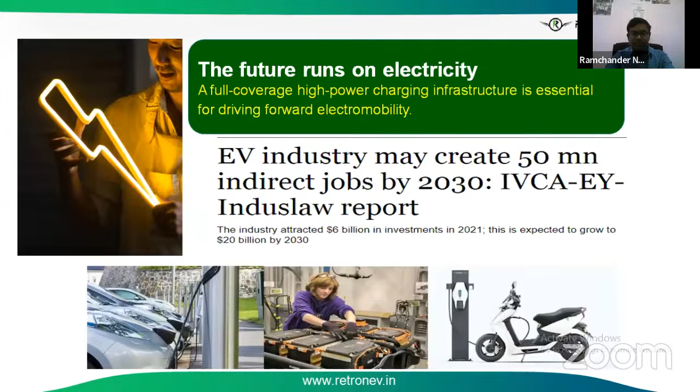That is the reason we have interacted with many professors and industries like HIW training centers. In this EV sector, many job opportunities are coming up, but students are lacking the skills. So for better understanding of the EV segment and EV components like battery, motor, controller - what are the characteristics, how to understand the basic things.

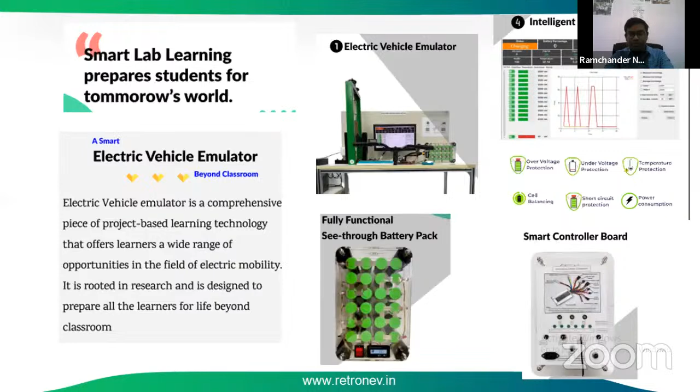This is a battery pack, developed as a fully functional see-through battery pack so every student can easily understand how it is connected - the series parallel combination, and the different components in the battery pack. This is a smart controller board, also developed in-house to understand in a better way - what different ports are there and how they should be connected. And this is the dashboard, where you can get every parameter of the battery pack as well as motor data like current, voltage, DOD, SOC, etc. If somebody is doing research on battery management systems, you can also develop algorithms.

This is our brief journey. At present, our trusted partners are Sri Vishnu Educational Society, BVRIT, and we are also tied up with SRM University, Presidency University, Arbutus Consultants, Agni Solar, and HIW.

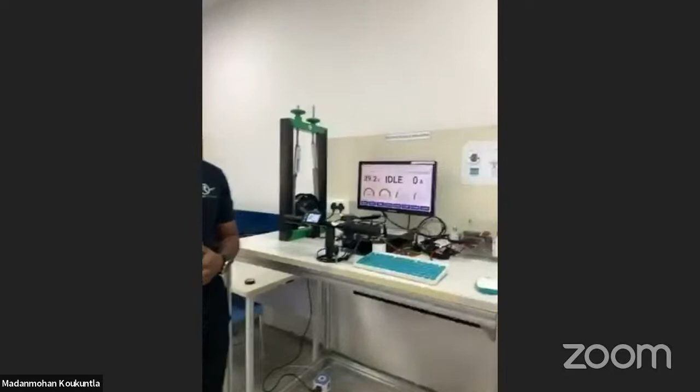I'm a startup co-founder into battery technology, and we've been doing a lot of work in the EV domain. Today we'd like to introduce our EV emulator, an electric vehicle emulator device purposely built for testing EV battery packs and BMS systems.

We have been learning a lot about EV technology, and we have already trained more than 6,000 students, faculties, and industrialists in EV technology. We have that kind of expertise in both solar and EV.

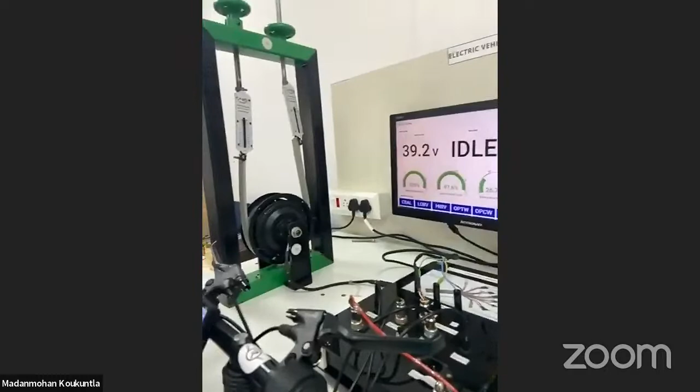So why this device? Whenever we were trying to move towards institutions, people were asking us for practical oriented training. We did not know what practical oriented training was, so we developed some testing machines in-house to test our BMS, our battery pack, and our whole system. This is how the invention was born.

We then developed a machine which is very easy to learn for students. The EV emulator is a project-based learning technology where people can do experiments and learn. So what is it now? It's a project-based learning technology.

I'll go through some components. This is everything that is there in the test rig. You can see there is a transparent, visible battery pack here, which is an industry grade battery pack. You can switch it on and off, and you can see there are so many cells connected in series and parallel.

This gives you a wide understanding about how batteries are made and what technology we have been using in putting the cells together, where the wires are coming from, how we thermally improve it, and what thermal constraints are involved. Now let's go to the battery pack again, and let's also go through the BMS.

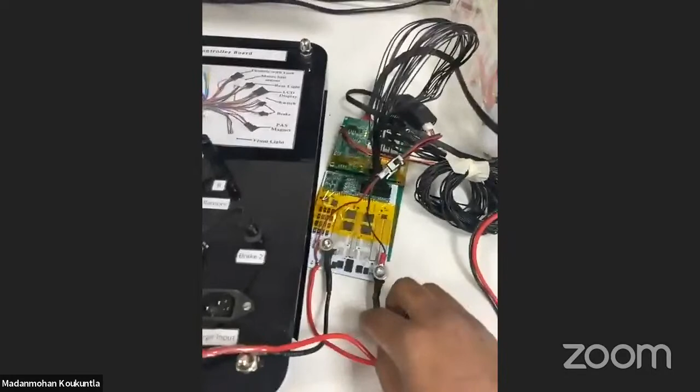If you can see the chip over here, this is the battery management system, and also the IoT system with the master and slave configuration. If you're unaware of battery technology, batteries do need a management system.

There are so many cells here, like 24 cells right now, and there can be more than 200 to 300 cells in a two-wheeler and more than 3,000 cells in a four-wheeler. So how are we going to manage all the cells here? The battery management system does the work.

You can see the switching circuit, the power distribution unit, and also the IoT board here. There are also multiple sensors connected, which will be placed inside the battery pack, giving you the values over here.

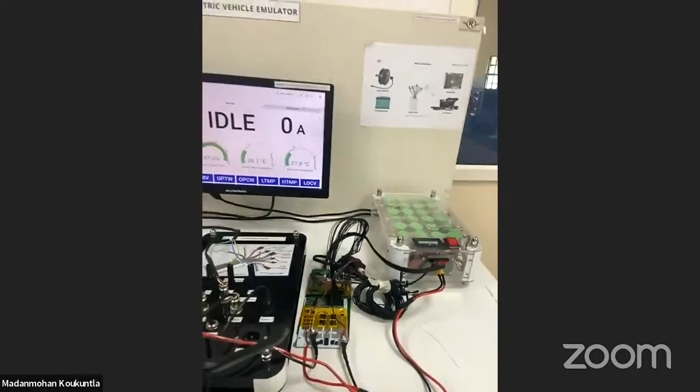We also have developed an interactive dashboard. On the screen here, we can see the voltage and the state of the BMS, and also the current right now. There are so many other faults that you can see here.

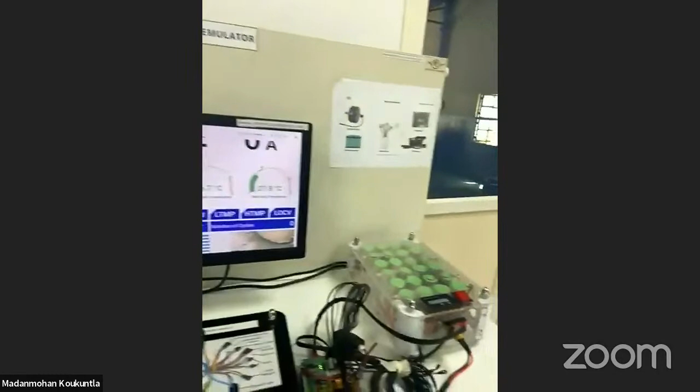If there is any fault in the system - basically we have many types of battery packs and BMSs. This is a smart BMS system developed by us in collaboration with another company, where we are able to figure out everything in the system. There are multiple various faults here, and we can also look at the state of charge, state of health, maximum temperatures, and more.

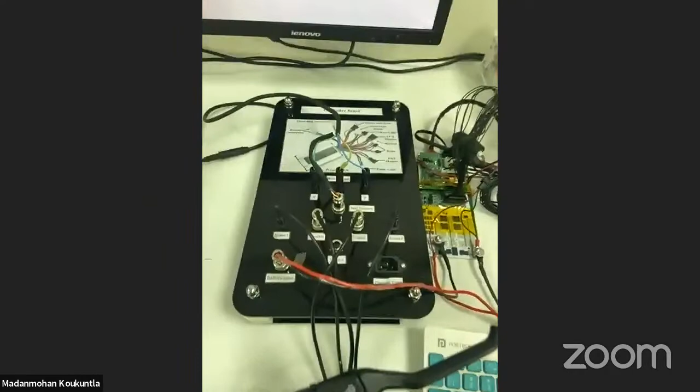I'll come back to the screen. Now let's see a different setup here - a smart controller board, where everything is integrated. The battery, the BMS, and also the motor, everything is integrated here.

This is much like the brain of the system, while the heart of the system is the battery pack, and the brain of the system is the controller. We have developed the controller in such a way that it is easier for us to assemble.

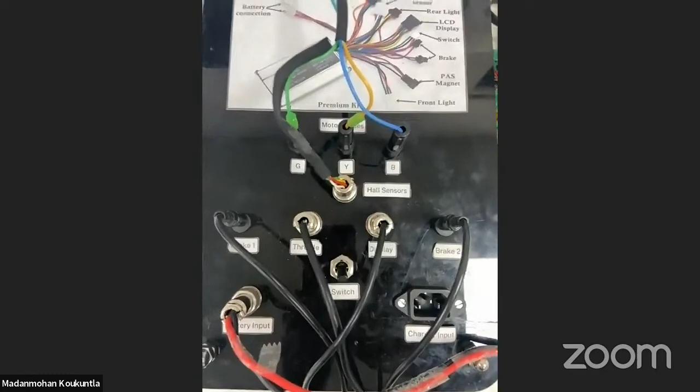It is easier for us to assemble and understand what are the various things happening there. You can see there are hall sensors, batteries, a display connector, and all these things. So this is the whole setup.

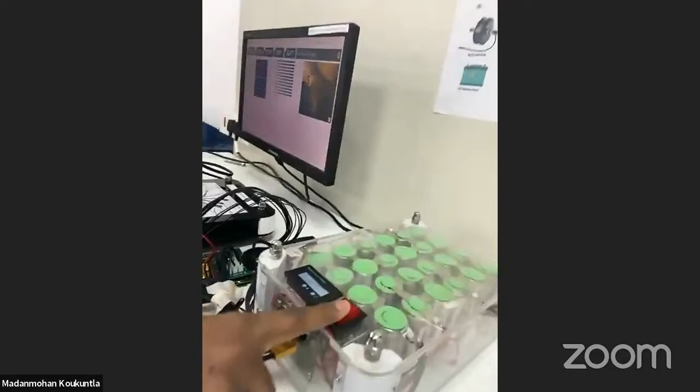I'll just walk you through how this is being run. So how do we switch it on? We just switch on the battery pack, and then the BMS is activated. Once the BMS is activated, we have to turn the switch on here in the controller unit, and then we have a knob over here. Just switch it on, and the system is turned on.

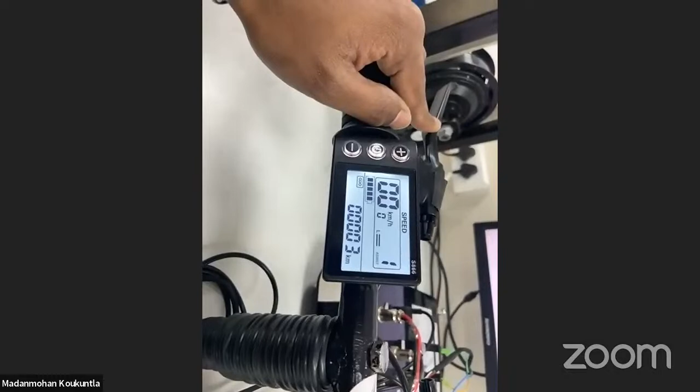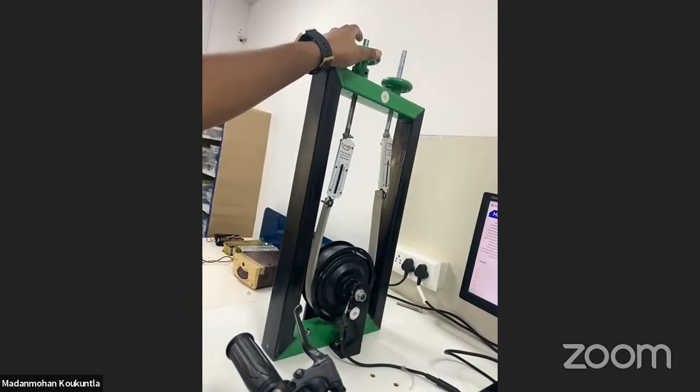You can see there is some kind of discharge happening there. And if I keep on increasing the load, you can see the change in current, right? As we keep on increasing the load, there is a change in current.

So with this, we are able to figure out the battery characteristics, the motor characteristics, and also the BMS characteristics. If we go down and I click on view over here, you can see there are individual cell voltages. There are individual cell voltages here.

3.2, 3.27, 3.29 - there are 12 in series. So every individual series is being monitored. So if there is any imbalancing fault, the fault will be shown over here.

We'll also look at some other components, other values here. This is CBAL, this is cell balancing fault. This is low battery fault. This is high battery voltage fault. This is open wire fault, and there are so many other faults in the system. So it will be easier for us to look at what is happening inside of the battery pack and what are the thermal constraints and each and every thing.

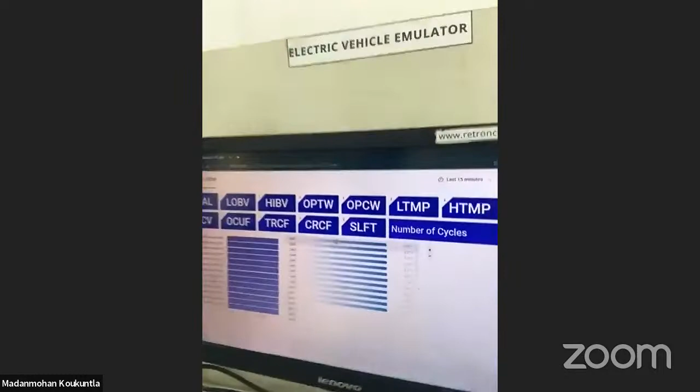You can also generate a graph over here. So whenever you increase or decrease the voltage and the current, there will be a graph generated, and that can also be downloaded. So what else can we do over here?

So what else can we do? As a student, we can perform multiple experiments here, much like figuring out the motor characteristics, figuring out the battery characteristics, and figuring out the BMS characteristics as well. You can also download all the information from here.

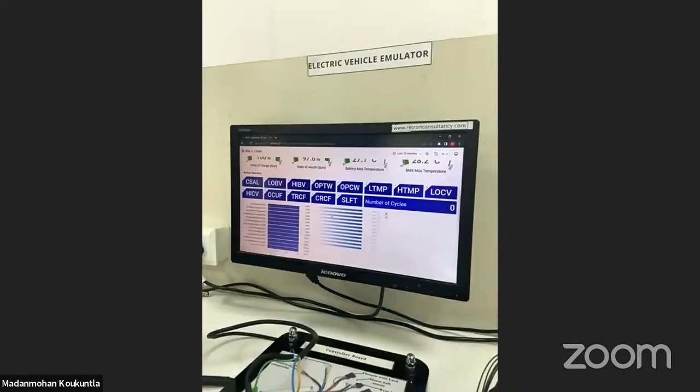Yep, I guess you're able to see it now. So every aspect of the whole system is being viewed over here. What are the experiments that we can do here? The battery study, detailed battery study, where you can figure out the optimum voltage, the lower voltage, the higher voltage, the cutoff, the over temperature faults, and everything can be studied over here.

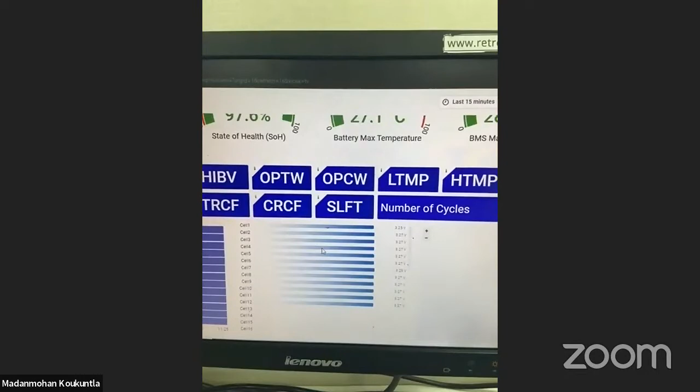So this is much like an industry-grade battery pack, equivalent to the battery pack that we use in scooters or electric vehicles. With this amount of knowledge, we can actually apply for many jobs and also get skilled and get hired by many EV companies. So this system is solely giving you enough knowledge on each and every component of the system.

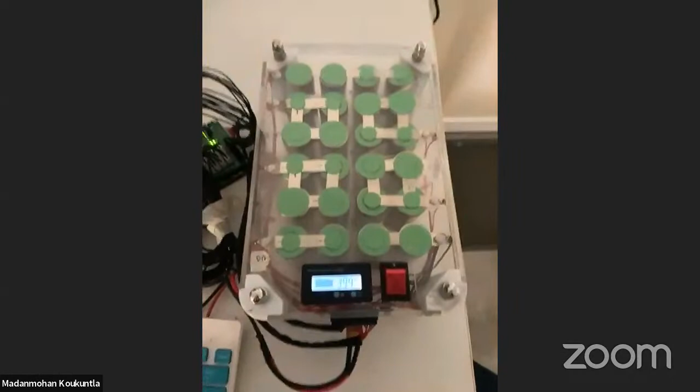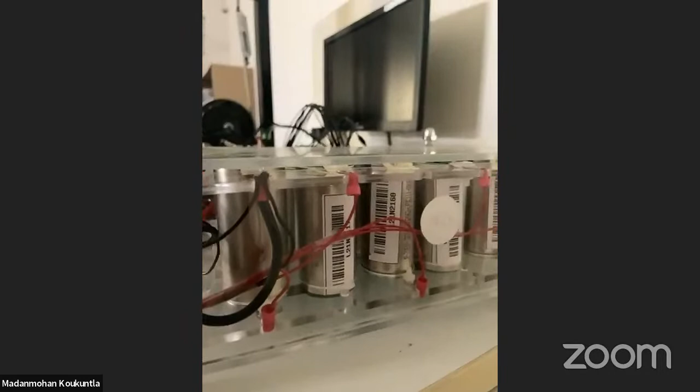Now we'll just talk about the battery pack right now. You can see there are multiple cells over here. Each and every cell can be viewed over here, and we have a separate barcode for it, just like what people in industry do. So every cell is being tested. We can individually test each and every cell and also monitor its voltage, current and temperature conditions.

You can see there are multiple wires coming out of it, and that is actually going to the BMS. This is the main terminal of the battery pack - the positive and the negative terminal, and also the JST ports.

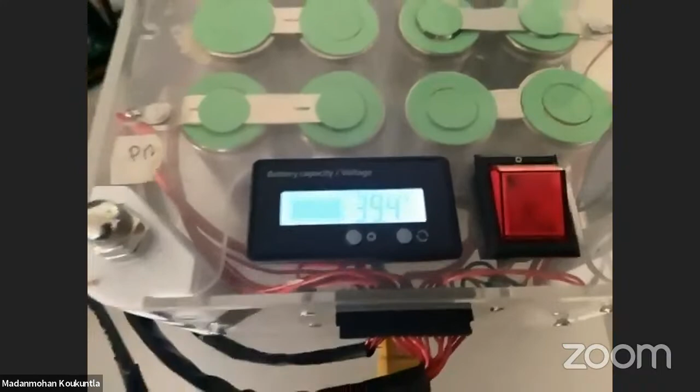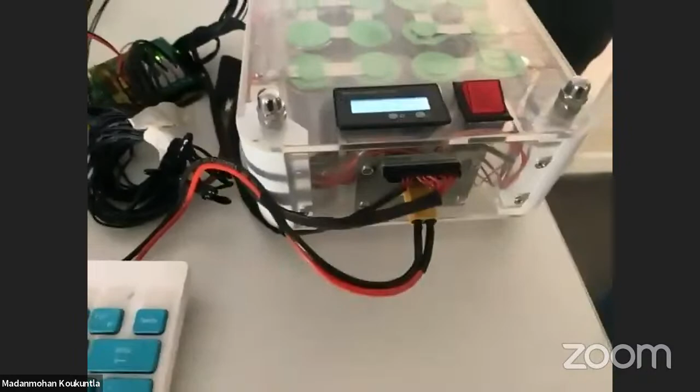So what we call as the JST ports. And here we also have the battery voltage and also the power switch. You can see there are multiple connections in between. These are the nickel strips, which are connected to the BMS wires again. And here it goes to the BMS system.

So there's the BMS, the power distribution unit, the control algorithm unit, and also the IoT board here, which transfers information to the system. Okay, and the control system.

There's a lot more to talk about the BMS. We can do various experiments on it, such as seeing where the voltage is being cut off, and also if it is balancing the cells or not, which can also be researched here. Many industrialists and researchers are opting for this product so they can do a thesis or project on it. As industrialists, we use this emulator so we can figure out the performance of the BMS and whether it's functioning well or not, and all these things can be looked at here.

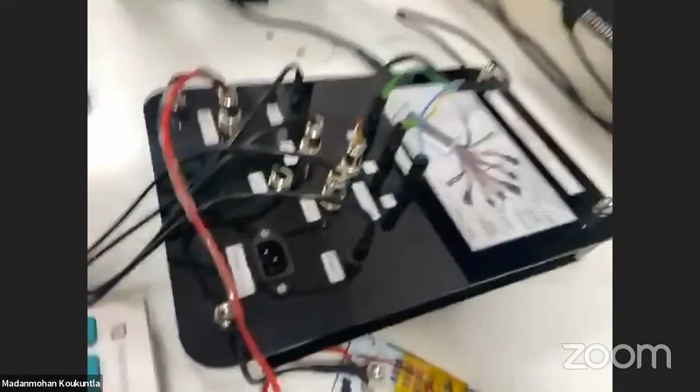Okay, so this is the smart controller board. Everything is here. You can see there are multiple phase wires connected, the phase wires of the motor. The motor is connected here, and this is the power unit, the battery input, the brakes, the throttles, the hall sensors, and everything is connected over here.

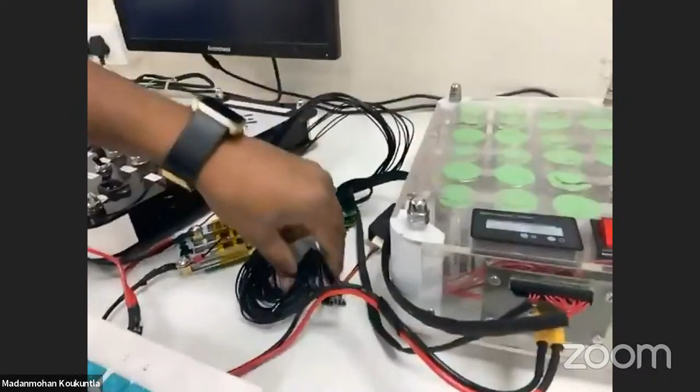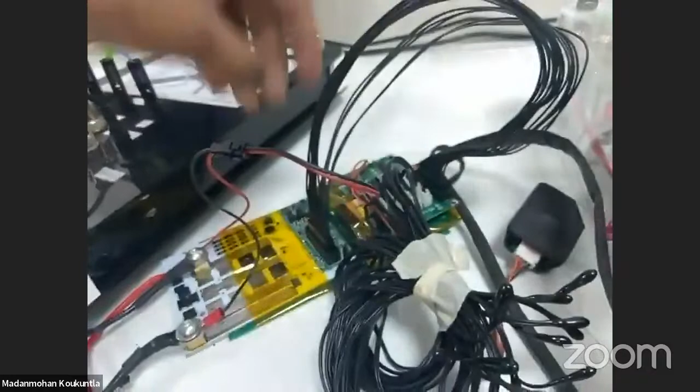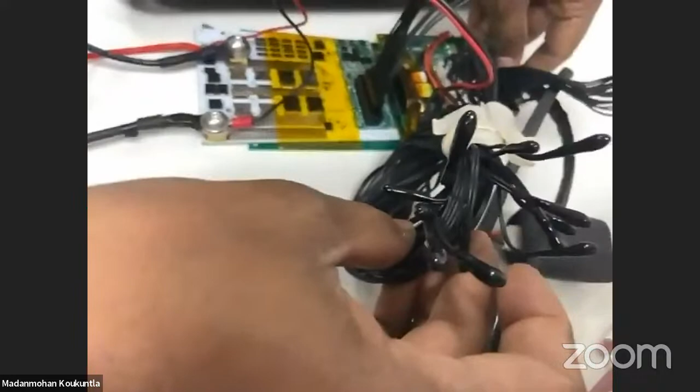So here are also the thermistors, the NTCs. These will be connected inside the whole system. Yes, this is the whole power electronic circuit, and these are the temperature sensors. As per AIS standards, we need to have at least 4 temperature sensors. These will be put inside the battery pack or inside the motor controller, wherever there is a heat-generating aspect.

We have seen a lot of battery pack failures, right? These can be detected by this system. If there are any temperature changes, the battery pack's temperature can be detected, and we can isolate the whole system. There are other systems here which can communicate with the main board.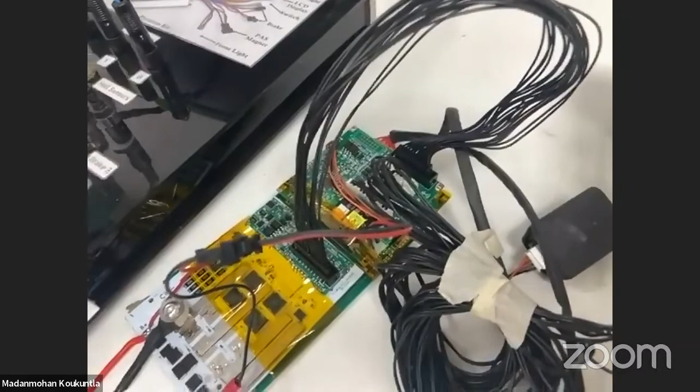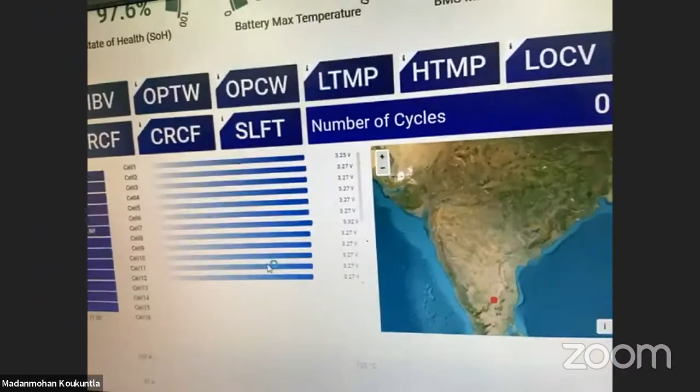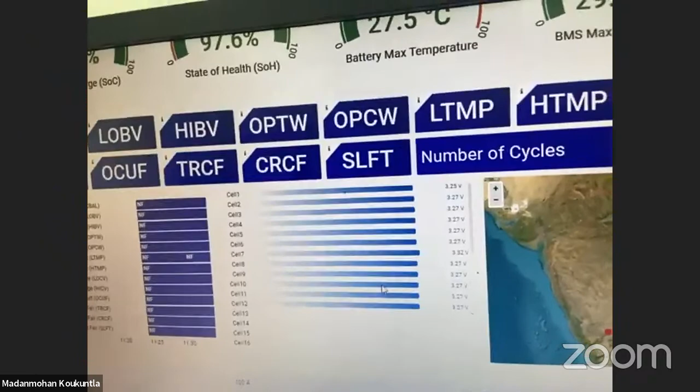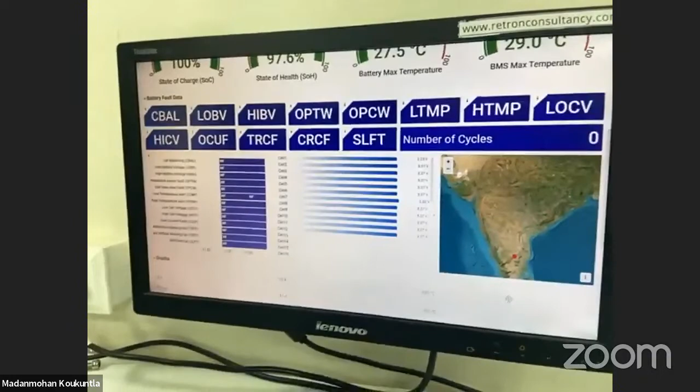The good thing about the smart BMS is that before there is any fault in the system, before a customer is driving the vehicle and experiences the fault, we can predict the fault and take necessary measures. For example, if your battery is going to degrade tomorrow, or there's a lot of imbalancing fault and so on, we can directly contact the customer and tell him that the battery needs to be serviced immediately. So each and every aspect of the cell can be monitored here.

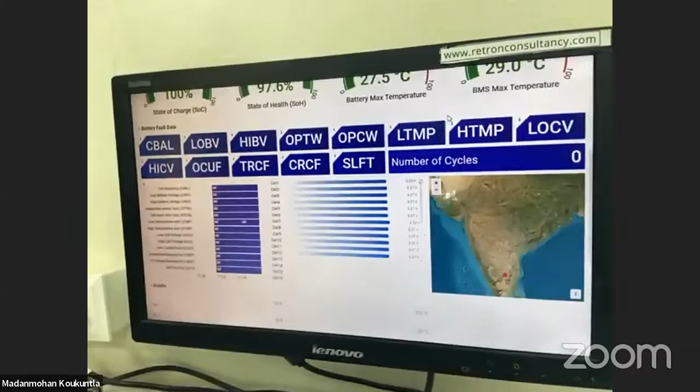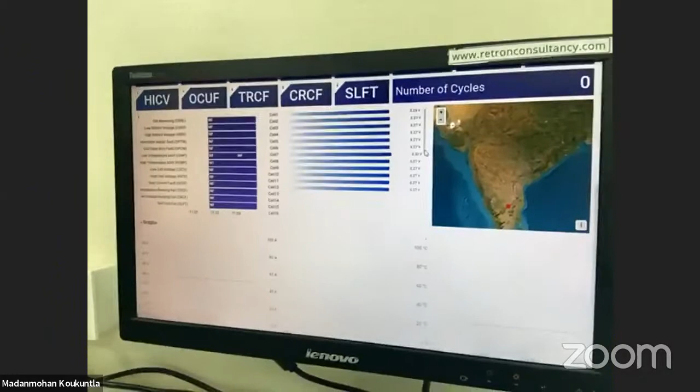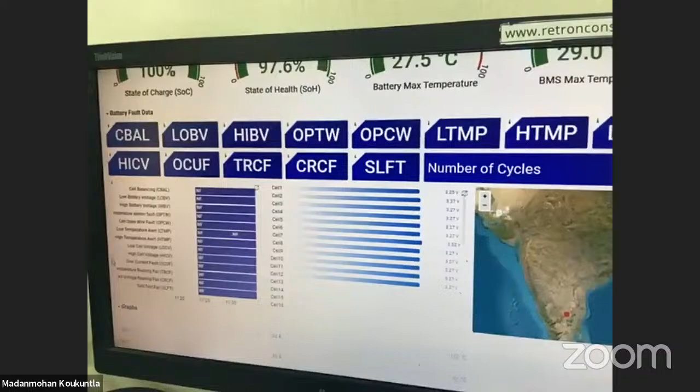Regarding the incidents of electric vehicle explosions and so on, the battery management system plays a main role here. There are multiple cells in the system which have to be monitored every second, right? If there's any fault in the BMS, if it's not able to detect temperature rises, or imbalances in the system, or open wires, or mechanical impacts, then the BMS will not be able to isolate the whole system. So the BMS already manages all these things and makes sure that the EV is safe.

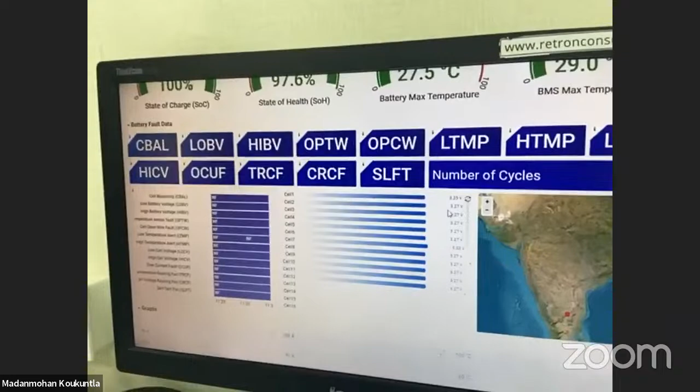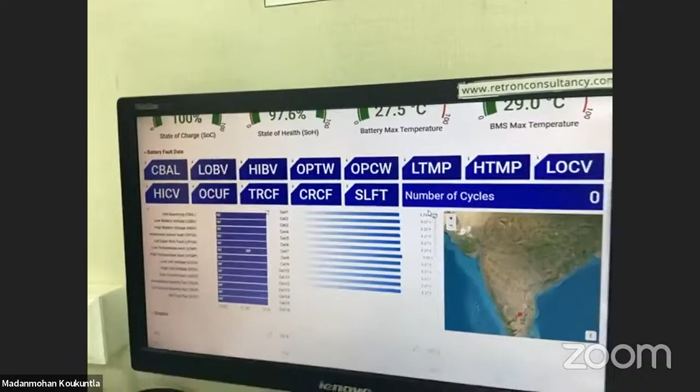Is it true that normal piston engines always have a higher torque capability compared to EVs? Actually, EVs use motors which have much higher torque.

There are multiple motors used in EVs, like SRM motors, BLDC motors, and others. These motors can have a lot of torque. For example, the torque of a normal electric cycle is 36, and for a bike it is even more.

Now we are also using a gearbox along with the motor. There are electric vehicle systems which have higher torque than IC engines. IC engines are very robust but also bulkier, whereas in the latest technology we can see a 50 kilowatt motor in the size of a smaller scooty engine. That shows how powerful the electric motor is.

The battery is connected in series or parallel, or a combination of both. Whenever you build a system, you manufacture it accordingly. Here you can see cells connected in series and cells connected in parallel. This is a 12S2P configuration module, suitable for the electric two-wheeler section.

If you're going for an electric three-wheeler, there will be 300 such battery sources. When building an electric vehicle, we need to look at the motor ratings, the load requirement, the vehicle speed, vehicle range - everything has to be figured out, and calculations have to be done. With that calculation, we fix the battery sizing. If a customer needs 100-kilometer range, we have to design the battery pack as per that standard.

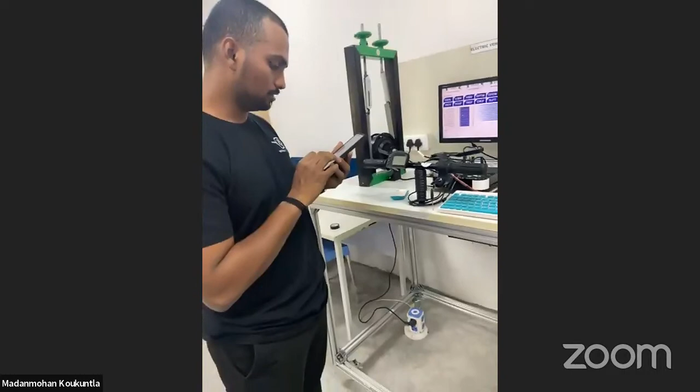Is the voltage the same for all types of vehicle motors? No, all voltages are not the same. For smaller systems, it starts...

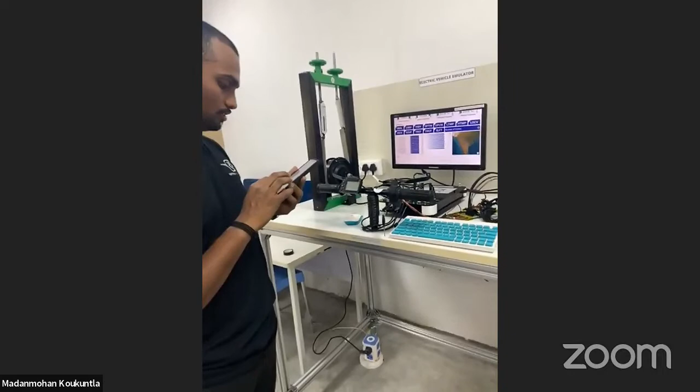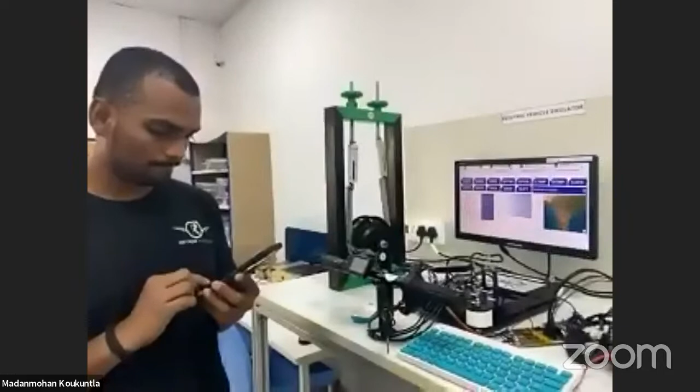Which type of motors are used? There are many types of motors depending on the application. For smaller applications, a BLDC motor can be used. For longer applications, the BLDC motor uses a permanent magnet. As the size of the BLDC motor increases, there can be magnetic issues with the permanent magnet. So for higher power motors, we use AC motors, synchronous reluctance motors, switched reluctance motors, and others.

Shall we go back? I'll give you a demonstration again.

This is how the battery pack's data will be used. You can go here and see the maximum temperature over here. The temperature is now about 25 to 27 degrees, with 27 degrees being the maximum.

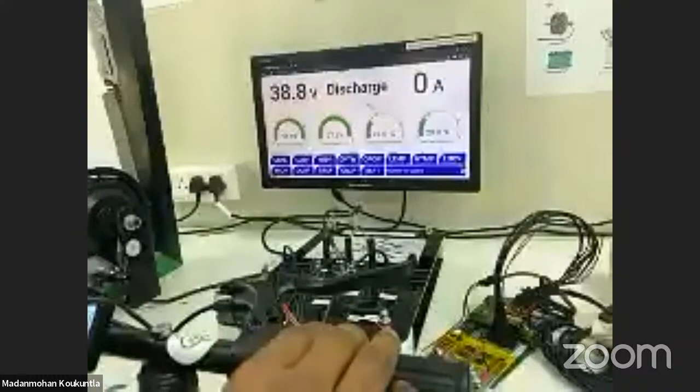It can go up to more than that as the load is increased or decreased, and you will see the change in current here.

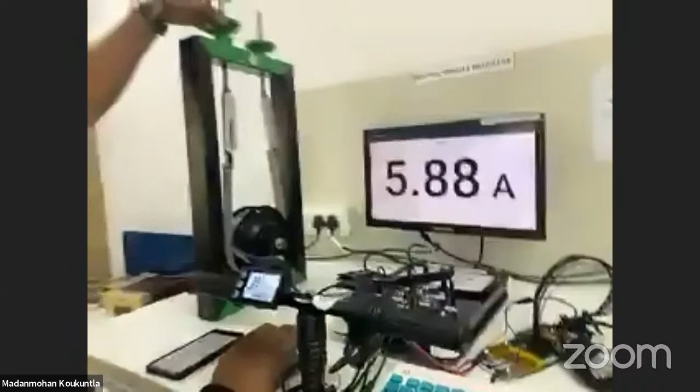While increasing and decreasing the load, we'll go see a look at the voltage.

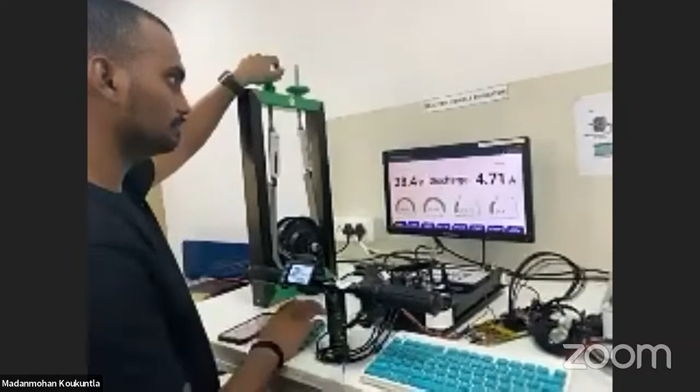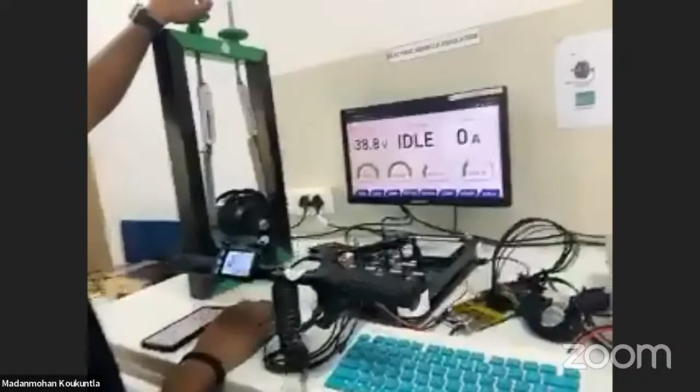Hello. Yeah. Hello. Okay.

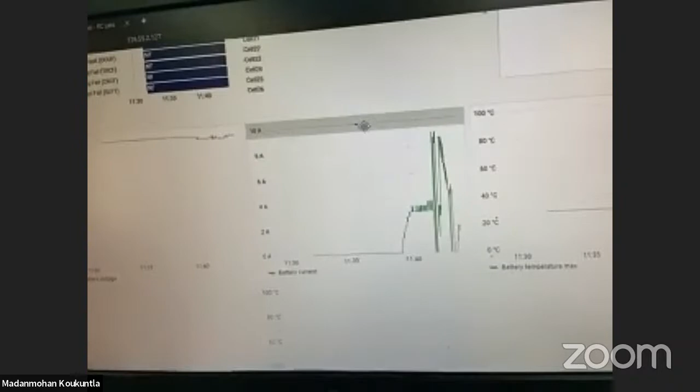So this graph can be clearly seen here, the increase and decrease of the voltage and current.

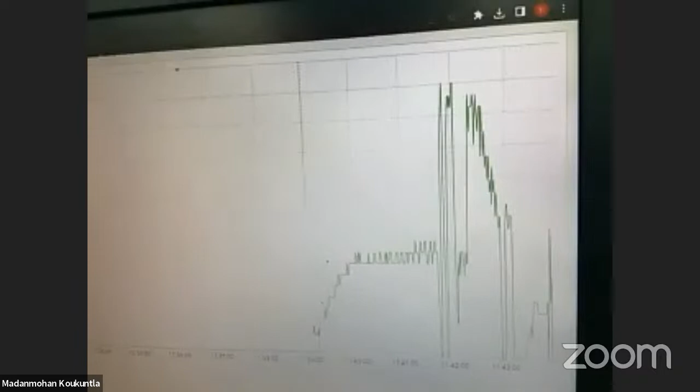So what can you do with this data right now? You can see how the battery pack is behaving. These are the motor consumptions, right? So the motor is getting a high current, the peak current.

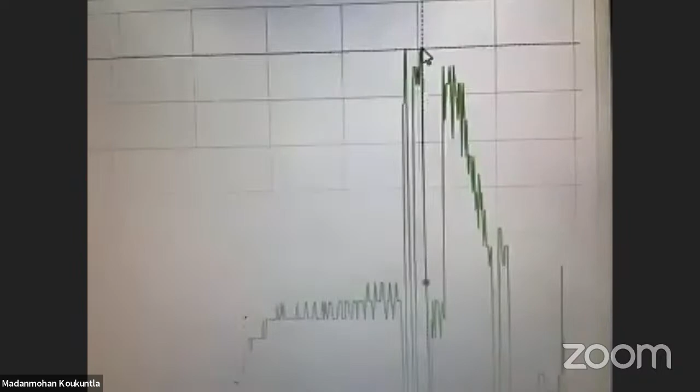So whenever there is any peak, we'll note that peak down and figure out the best configuration for the system. Also, if there is any peak current beyond 12 to 13 amps, then the BMS is going to cut the system down. Right now the peak current is somewhere around 9 amps, and if it goes beyond 12 amps, the system is going to cut because the whole motor is configured for this system only.

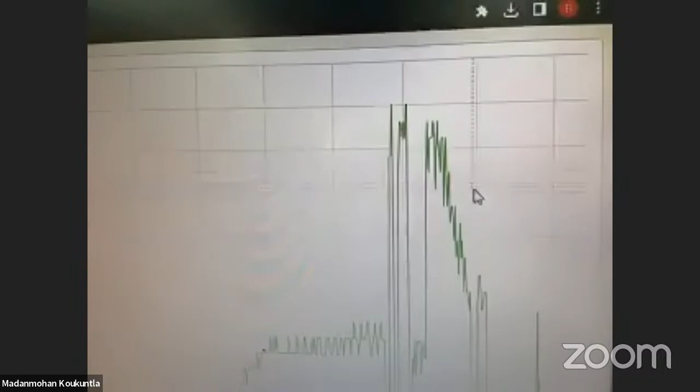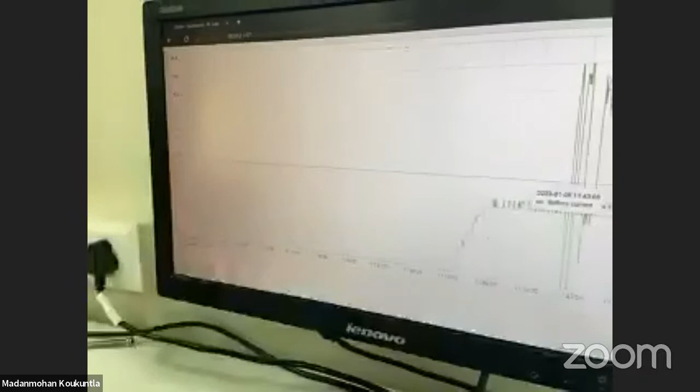So any questions, guys? Because there are a number of questions coming in. You can take a question from Narsimha Kumar: How does the system manage power distribution, for example during idling, starting, and cruising?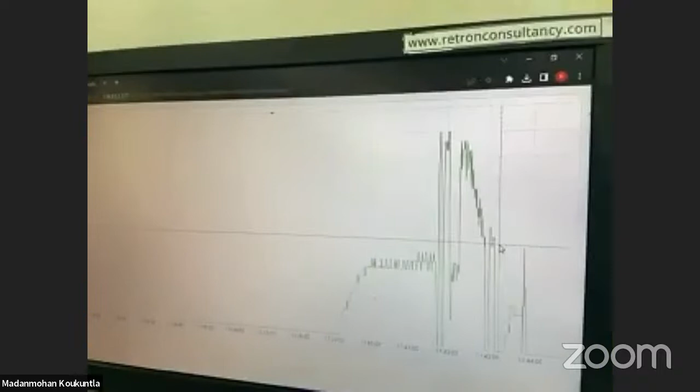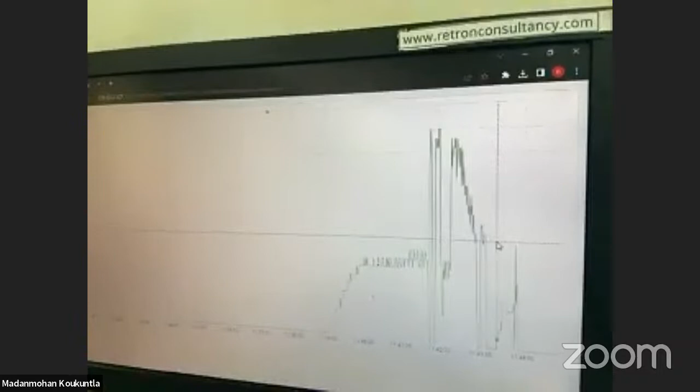Okay, so I can see the questions. I'll start from the last one. Full electric BEVs today have an average range of...

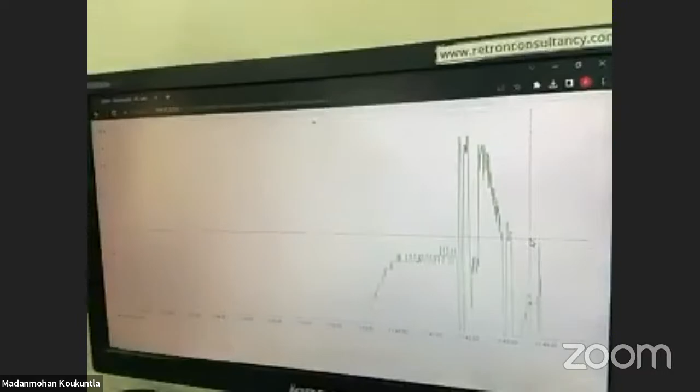So what type of battery is used in electric vehicles? Nowadays we have several battery chemistries, out of which NMC and LFP are the most widely used. We also have lithium titanate, and we also have sodium ion batteries coming out, which have lower density battery packs. So there are several chemistries in the lithium family itself which have high density and high power capabilities.

Nowadays we are also looking for chemistries which are much more safer, because we have been seeing incidents. The batteries which have cobalt in them are very explosive, so we are looking for additional systems like that. There are companies now trying to make hybrid batteries, in a sense using multiple chemistries to make a single pack which can actually provide high power and high energy capabilities.

How much time will it take after discharge of full batteries? So it depends upon the load and speed. This battery pack is capable of giving at least 3.5 hours of continuous power.

Manage power distribution - since this is a single system where there are not multiple sources, if you're having multiple sources, for example a supercapacitor and a battery pack, where we need high power and high energy capabilities, we'll be using a switching system where during starting a different source of power will start. If we need more power during starting, the supercapacitor will do the work, and after starting, during idling and such, the lithium battery can do the work. We have also developed a project for IOCL, basically to figure out which source to engage.

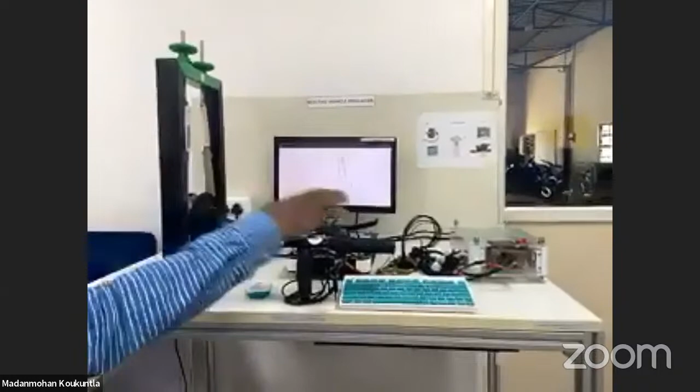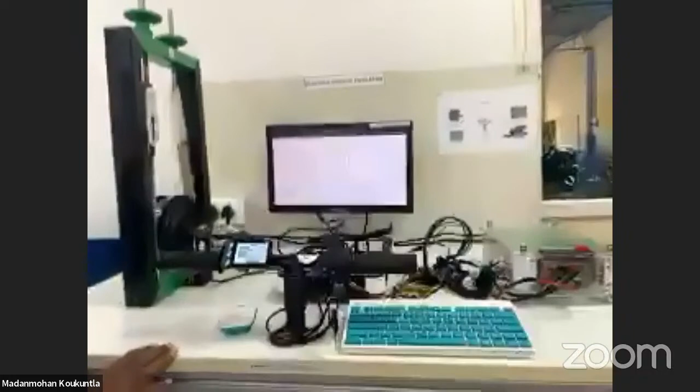You can just show the whole system - this is a complete EV emulator along with this bench and the system, a complete setup. The complete setup is indigenous and developed here. This complete setup is going to deliver, if anybody is interested. If you look at this particular system, you can easily get knowledge on complete EV technology, not only battery, not only BMS.

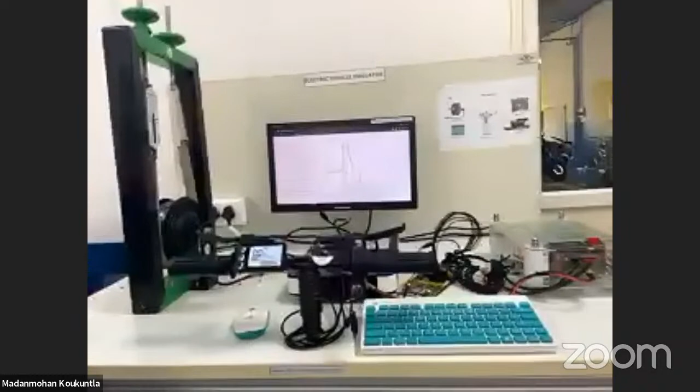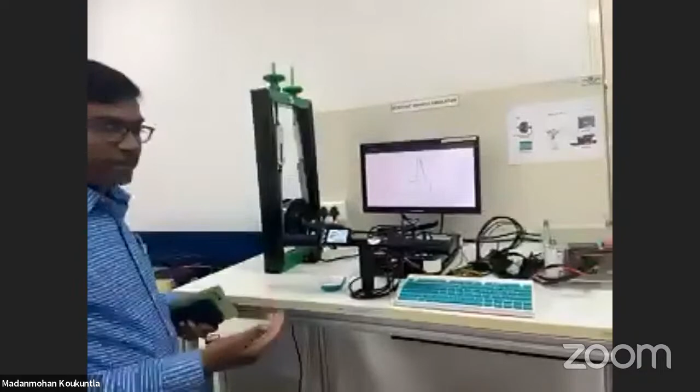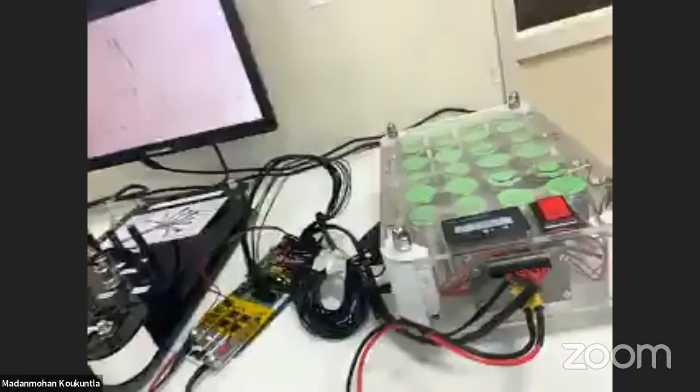So you will get all the knowledge - how the BMS works and what different types of protections are there, and what battery chemistries are there. This is one chemistry, LFP, and there are many more chemistries available. If anybody wants, we will also provide those chemistries. But this system provides complete EV technology and EV knowledge to students as well as faculty. That is the reason we have developed this. And this is the customized software - nowhere else will you get this.

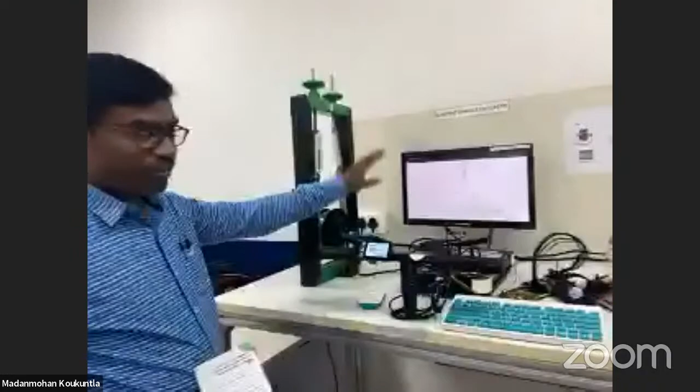You can also do research on this and you will get complete knowledge, your students get trained, and many job opportunities will be there.

Here you can conduct many experiments, for example electric vehicle assembly. This is complete plug and play type, you can see all the connections. After supplying, we will be providing one day training on this. Completely plug and play, we will give manual and we will be training.

You can study electrical motor characteristics under different loads, study battery pack characteristics, detailed inspection on battery management characteristics, detailed study on electrical charger characteristics, and hybrid vehicle assembling and testing. All this can be done, and your students as well as faculty get trained.

I request all of you, please remember, EV and PV is the future. Electric vehicle technology is going to create lots of jobs. I request all the faculty members who have joined to please concentrate on EV and PV technology also. This has huge job opportunities.